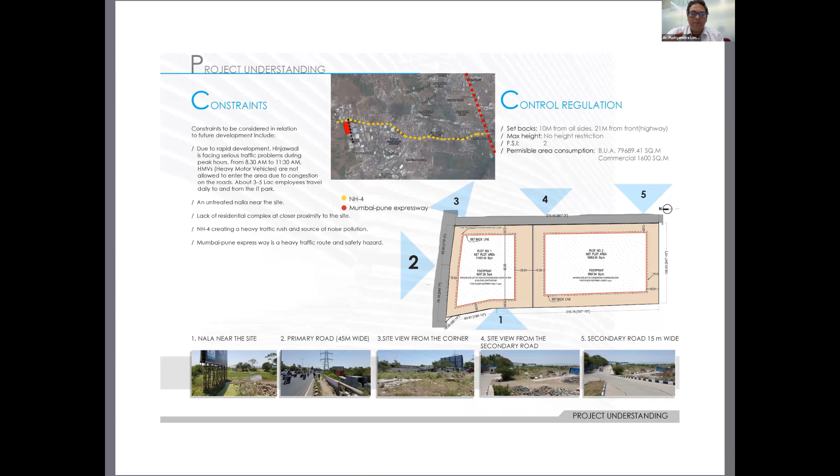So what we did, we split the whole project into two parts. The retail we removed separately, and we kept the IT park box separately. And then we detached them, looking at the directions of the sun and things like that. We detached them into two blocks and created a little space in between for a little spillover space. So this is the general massing we did.

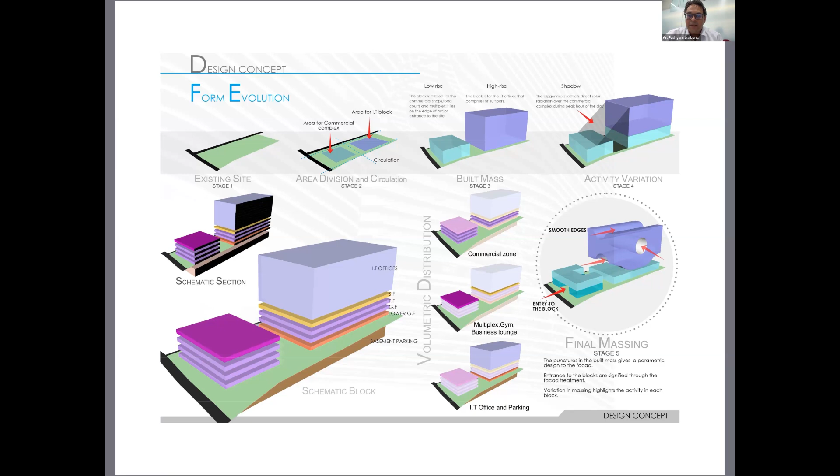Further, if you look at the image on the right hand side, we cut the building in between and scooped it out to make it more a linear kind of footprint, so that you are able to get a shorter width of the spaces inside rather than a large one where you would have to have artificial lighting, and also to get cross ventilation. Also, if you look at the entry to the block, like what the gentleman earlier was mentioning, it is exactly done like that.

Here, though we had a retail space of almost 2.5 lakh square feet, like a mall itself, we didn't want to make it air conditioned. So we split the buildings in two parts in the front portion, and let the air pass through it so that we could have a nice walking space and make it feel like a walking area for a mall from a retail perspective. At the same time, we gave internal large spaces, and we reduced the air conditioning, and when the air flows through it, people have a nice ambience. At the same time, in the covered area they're able to walk. So that is what we did.

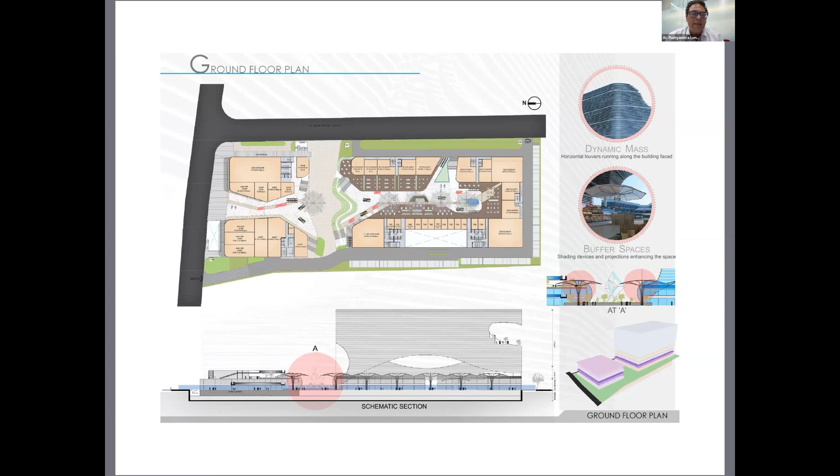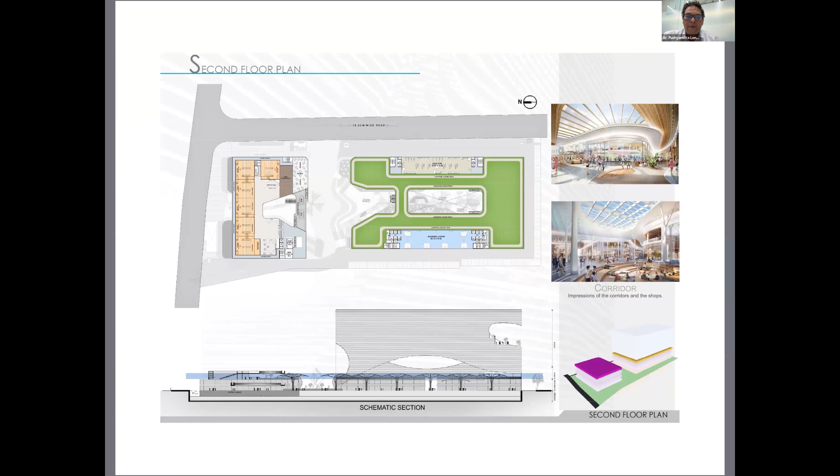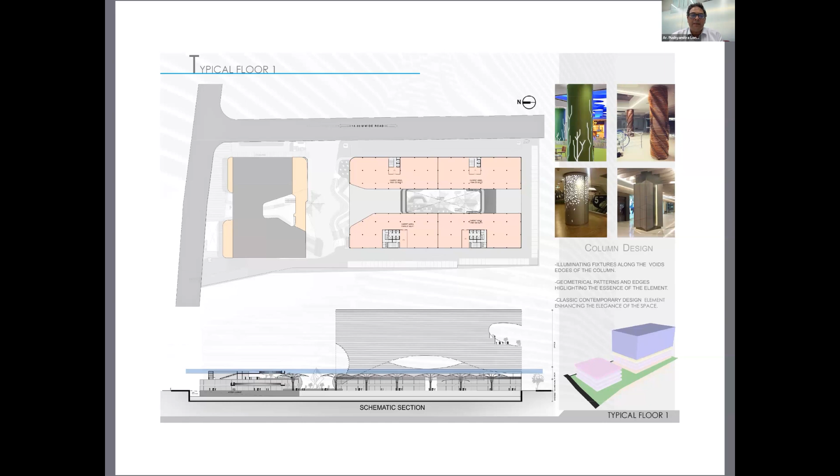And then, like I told, we created a plaza in between, a terrace where people, not just at the ground level but even at the higher level, can enjoy the greenery and other spaces, and they can enjoy the entire space. The IT park block, though it was like a big bulk, we split it into two parts so that you can get enough light from both the sides, and also ambient lighting, so that you don't have to depend so much on artificial lighting.

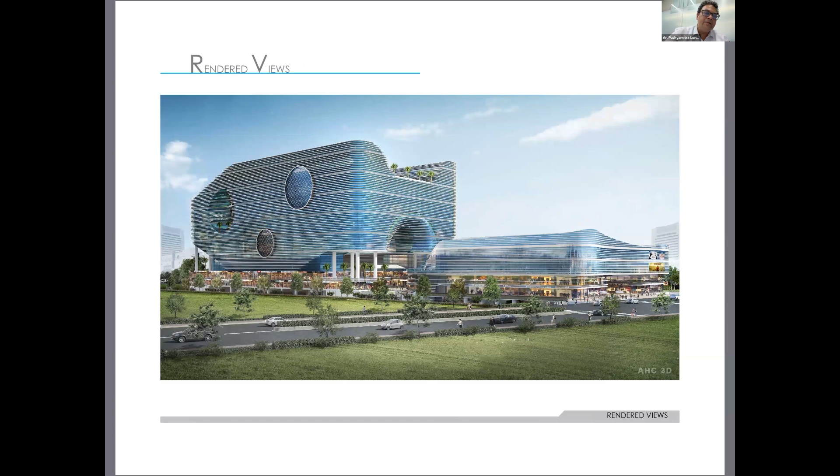The other level blocks. I'll just quickly go to the views. So this is the typical elevation, what it looked like. Finally, the building looks like the rendering. Initial renderings were looking like this, and this is the front portion where, like I was mentioning, there's the free flowing space from one end to the other end. So you get a large plaza for the retail and a wide opening where you're naturally just walking.

The top portion where you see this striped kind of a thing, though it looks glossy, is actually part of the cinema, where to maintain the look we gave this kind of strip, but it was completely done out of GRC. So there's no glass used here, only a blue paint which gives a feeling of glass; wherever required, we reduced the use of glass. At the lower level where the retail is, we put clear glass glazing so that all the merchandise could be seen properly. But since it was under a shaded area, it doesn't have any glare or impact.

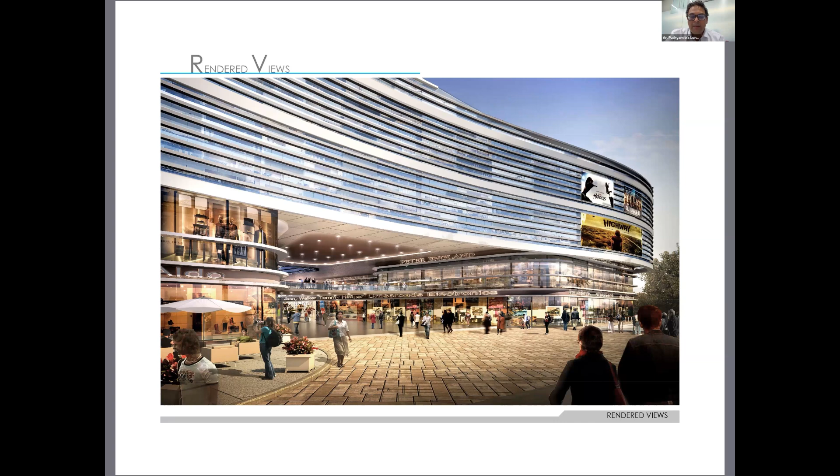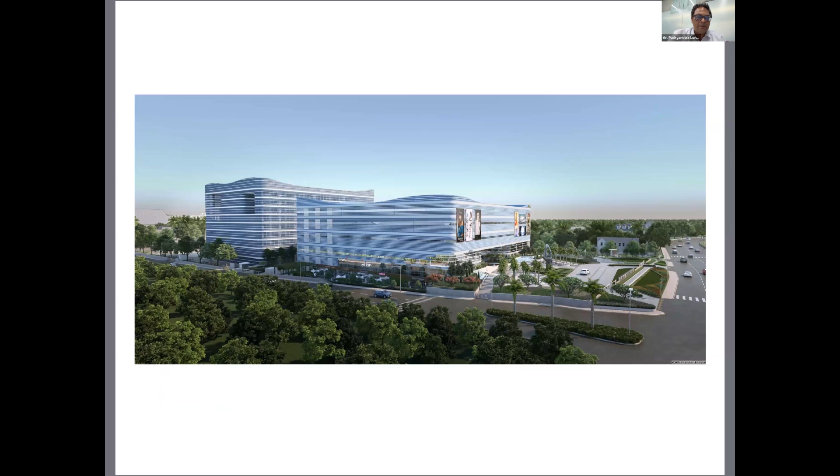These are some of the other views we had created. This is what it looks like today. The front retail block, and at the rear side we have the IT block. Like I was showing you in the initial images, the central area of the IT block is scooped inside and goes deep inside and creates additional space for people to walk in. Again, the strip kind of facade with glazing with these fins creates a little shading; it acts like a shading device so that there's no glare and direct heat gain on the glass.

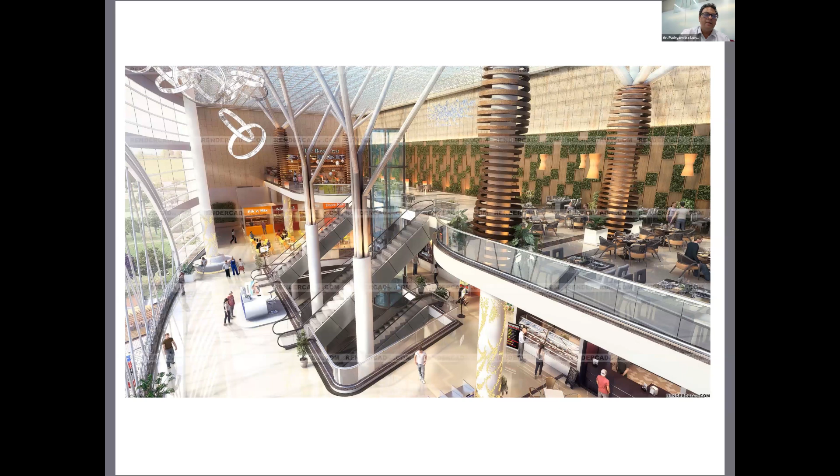This is the internal courtyard that is created in between. You can see that large circular opening, with the entire atrium with the food court and cinema; you have a nice ambience here. And though it's clear glass on this side, still the space feels very good and nice.

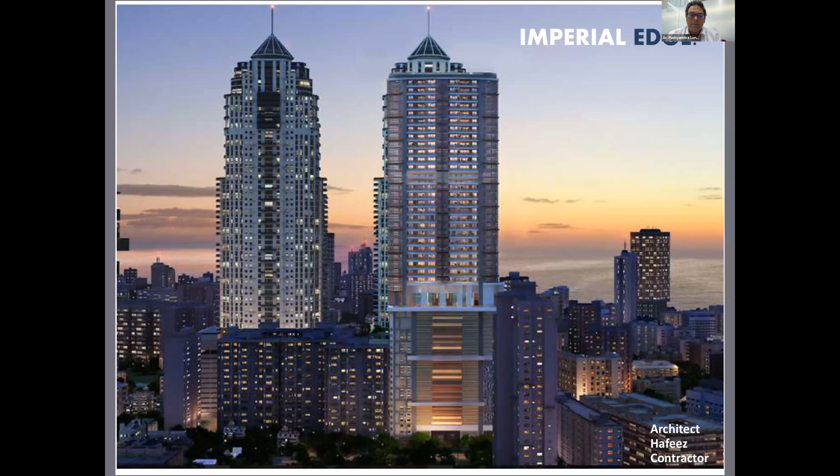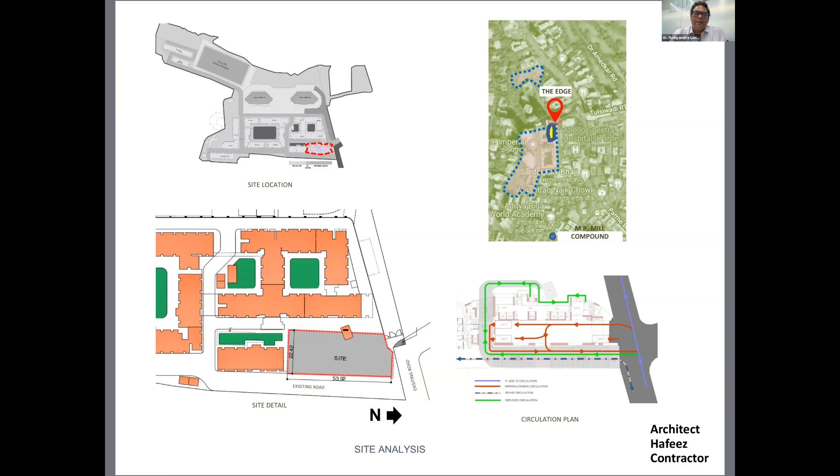It's called Imperial Edge. And here, the orientation of the site was north-south, where the east and the west sides were completely facing the sunlight. Also, the west side was completely exposed, and in South Mumbai, the western evening sun is quite harsh. At the same time, we had to see that we have large openings, because the views from this particular site are very good.

So we have divided the building into three parts here because of the restriction of the site. At the lower level we have an entrance lobby which is almost 12 meters high, so it makes a free flow area. Then since the footprint was limited, we had to go for a mechanized car park. And then a nice clubhouse, again within the building footprint, because we had to create that in whatever space was available. And on top we have the residential blocks.

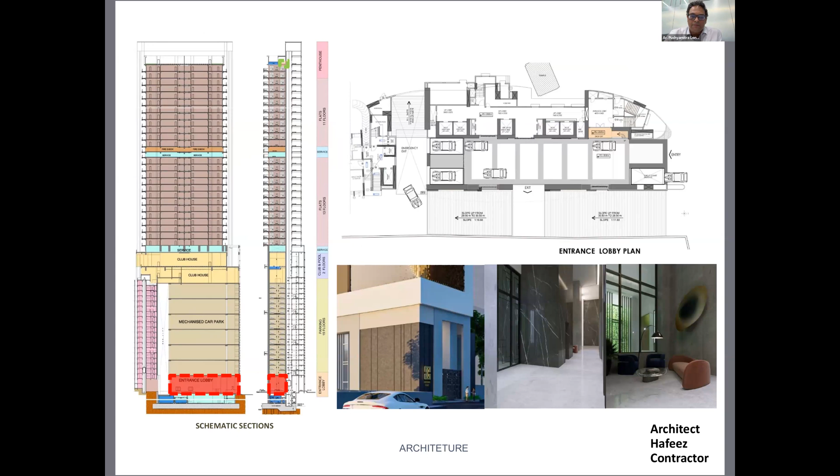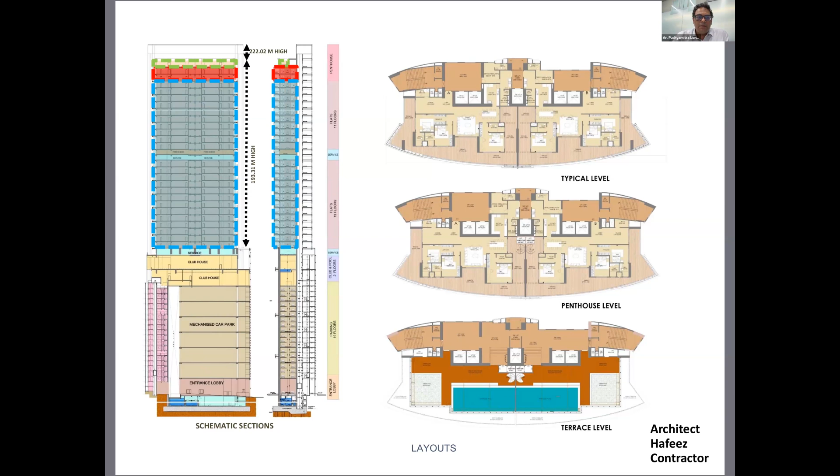This is a typical floor plan of the clubhouse where we have the pool and the staircases and the other blocks, so that it could blank out the direct glare of the sun. And with this, we could create a nice shade for the apartments and at the same time a deck area, which is again semi-covered, and the entire space became very ideal. This is one of the renderings which we had created for the clubhouse area, where we can see this large height with the pool, and because of this height factor, natural light comes in nicely.

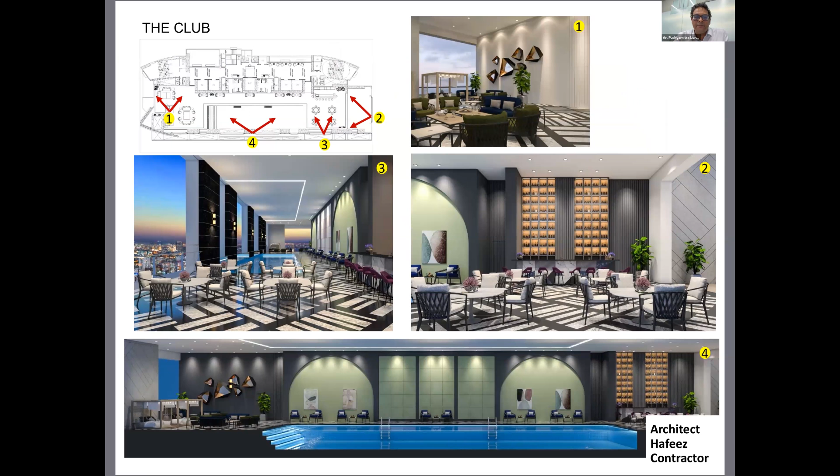The typical floor plan, which I just now explained, with these large terraces all around, and all the apartments having a lot of glazing, because that's mandatory and it was important for this kind of a thing where the views could be captured. At the same time, we tried to avoid the glare. So this kind of a terrace with this little depth helped in doing that. So this is how the building finally looks.

Like I told you, the west side has more blank wall, but we created little strips of painting, so it's a very low maintenance kind of a thing. Though it's a tall building, much more than 200 meters, we still tried to maintain it with minimal expense, and we created this nice effect. And these wraparound balconies with the strips give a very nice elevation to the facade.

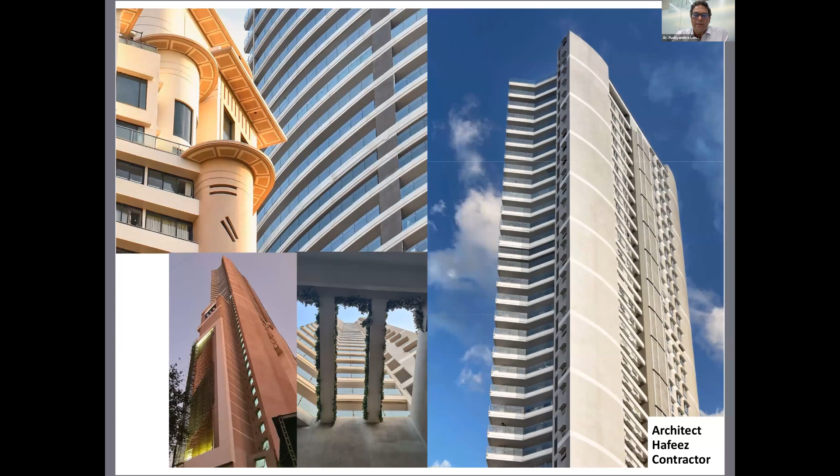These are some of the other images of what we have done, so you can see what I was explaining. You get nice views, at the same time the sun is not directly hitting, and the people enjoy these terraces very nicely, and they're very happy about it. There's the other side view, and from the top terrace you see the entire skyline of Mumbai. At the ground level we had the parking structure, with certain mechanical devices put in, and we also had the ventilation to be done.

At the same time, this was where an innovative thing was done. So we used GRC in the middle where the ventilation was to be put. At the same time, it had to look good because it's a very upmarket South Mumbai building. And at the corner, like what I mentioned about the edge, we had a corner which we wanted to highlight because that's what you see from the road. So there we engaged a designer from London who did a very interesting artwork.

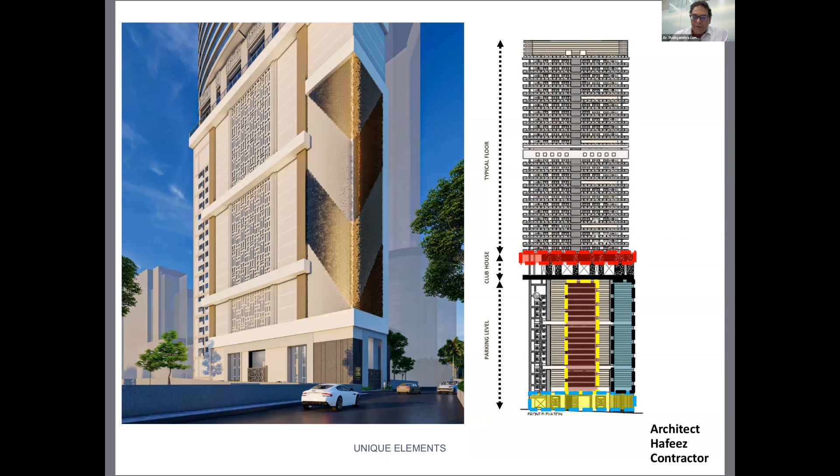So this is the facade in the front, and in fact there's another factor here. This was a very composite kind of a building where on the left-hand side you see there is an existing rehabilitated block also. So there's the parking tower in the middle with the ventilation facade, and also the corner which we had to highlight with some kind of artwork. So that's how the entire facade was created innovatively. And at the top, we have this large height for the swimming pool and that openness which I was mentioning earlier.